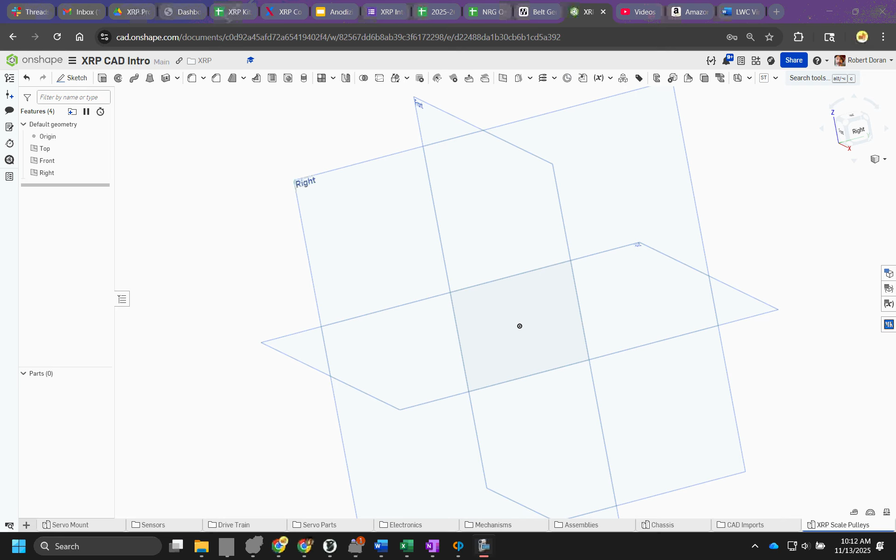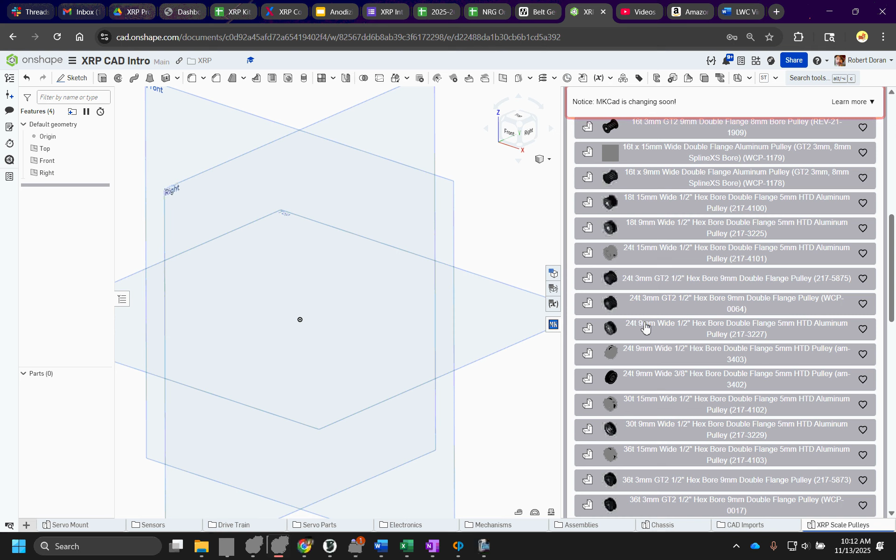All right, we're going to make a belt and pulley situation for an XRP scaled robot. You can get your pulley from a number of different places. MKCAD has a bunch, I actually recommend looking up a generator. I've got a generator or two, but we're going to just start with the one that's already available. We're going to go 24 tooth, 9mm wide. Doesn't matter that this is aluminum or not, but that's a pulley.

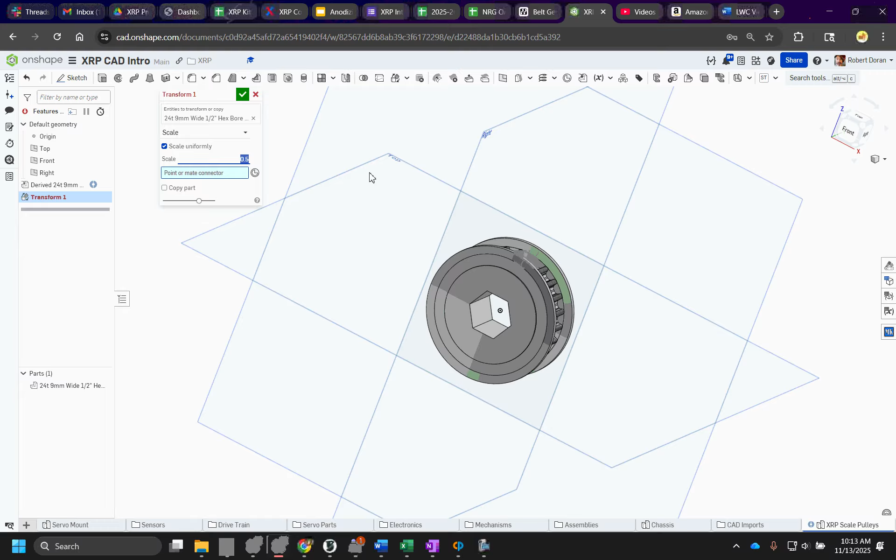Now, for an XRP robot, this is of course much too big, and you probably aren't going to use the hex shaft. The first thing we'll do is transform this. We're going to scale it down by 50%. Scale 0.5, and we'll just do the origin. There it is. A couple of things to modify.

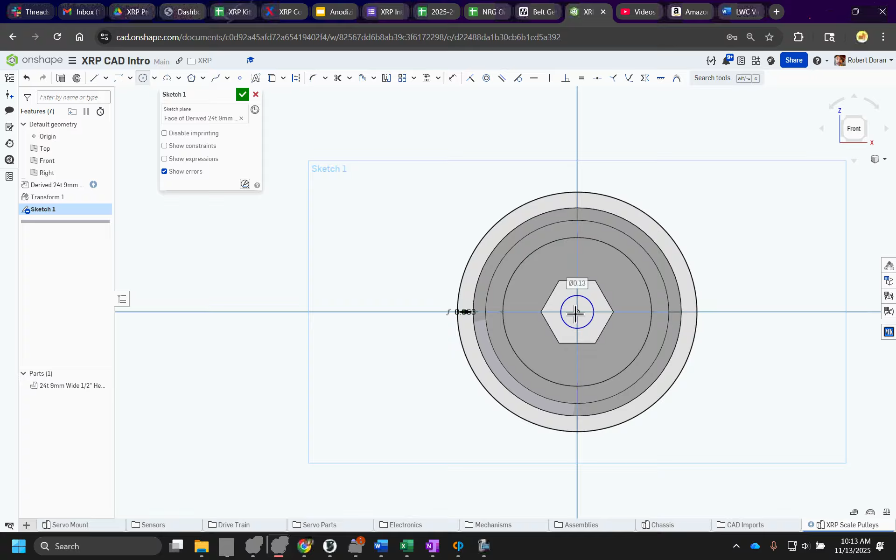I'm going to just sketch a quick extra flange I've found. I'll just do a little offset. It doesn't have to be giant, but maybe like a 1/16 of an inch of extra flange material. And then whatever your bore is through the middle, because if this is attached to an N20 motor or something, then the hex shaft isn't going to work. Or if it's a bolt or a bearing, make that whatever it is you want. This is our profile.

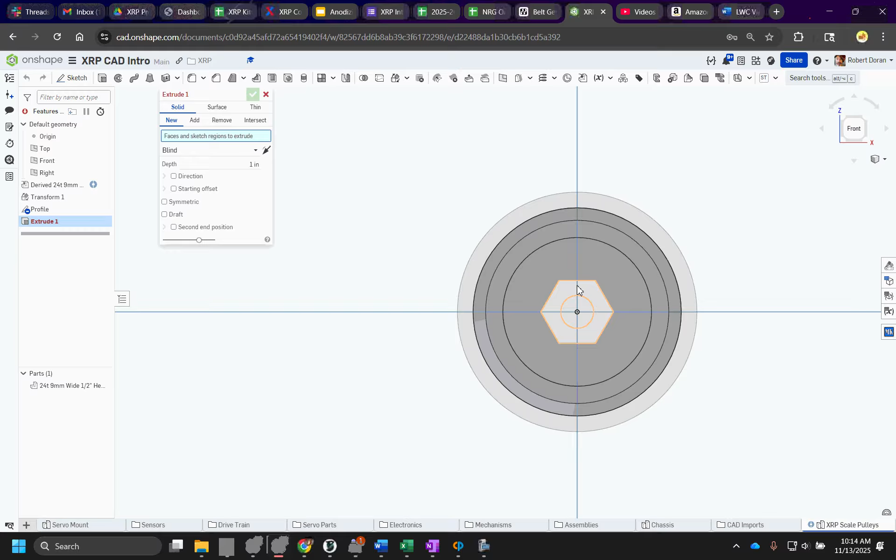And then extrude that however many ways you need to. So we'll extrude that through to the other side, however much it was. I didn't even check. 0.285.

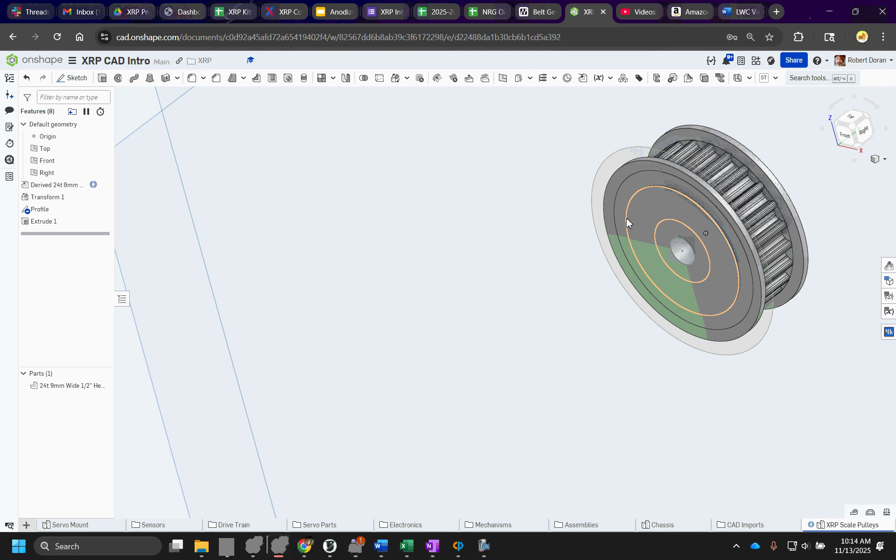And then your flange, and again, I would give yourself some extra flange on this one, because we're going to need to use this with 3D printed belts. We really don't want them flipping off. I don't know what the actual distance is here between these. 0.02.

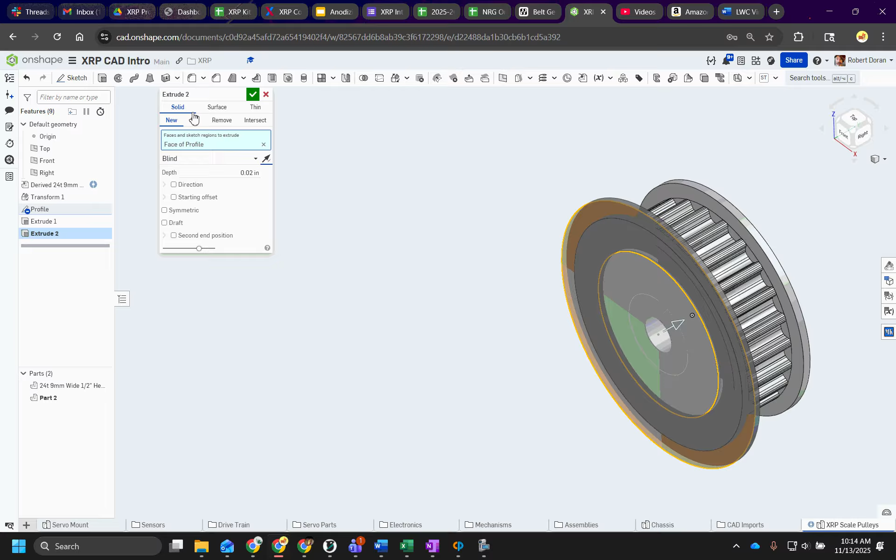So let's extrude our flange, 0.02 the other way, and please- right, extra flange that way. And I don't know why it didn't go all the way across. I'd rather that it did. So let's try that again. Instead of 0.02, let's go 0.034.

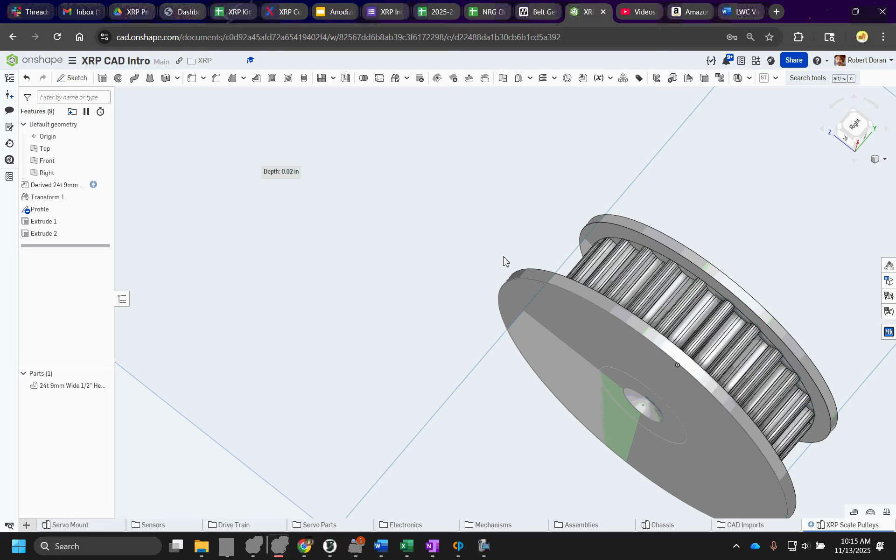It's okay to lose a little bit of fidelity and all this, it's gonna work, I promise. And then do the same thing, flange for the opposite side here. I'm not even gonna worry about that. Let's get ourselves- or let me just pause and do that again. There's our pulley. There it is, and it's small.

It's extra small. To get our belt, we're actually going to go over to Maker World. Maker World is Bambu's repository for 3D printed things, and they have a belt generator for your timing belts. We use HTD. We're going to customize. We're going to log in.

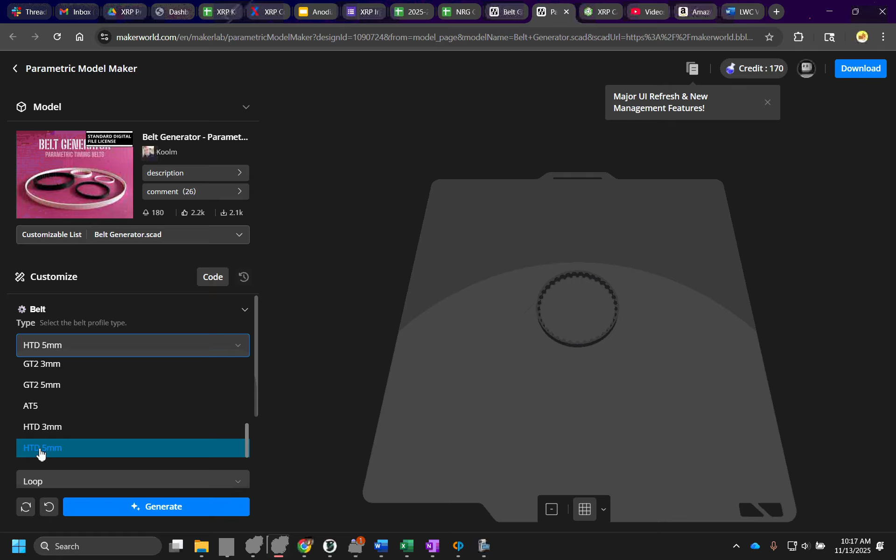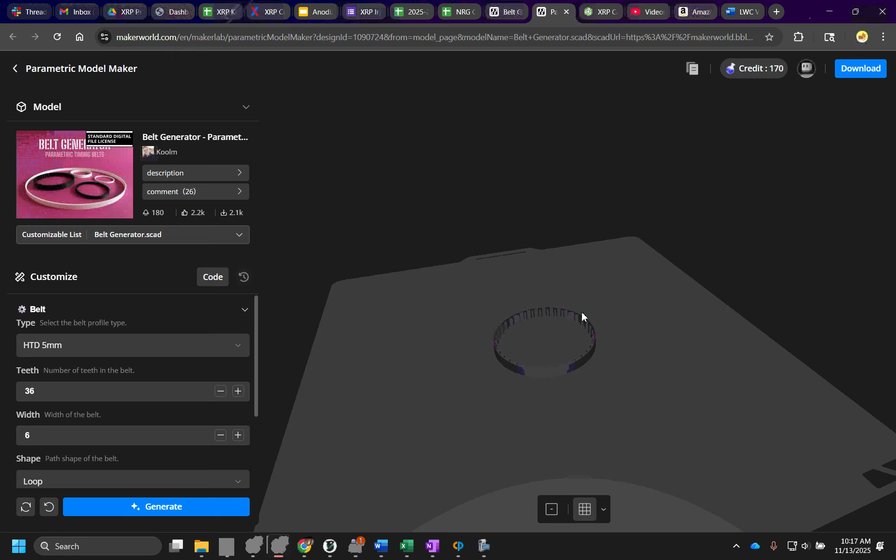Customize, and you've got a bunch of different options. Again, we use HTD 5mm, and you get to determine the number of teeth that you want in the belt. The way we use that is the WCP belt calculator to find your distances, and just remember, our distance is going to be double what you need for your XRP robot, because we're scaling everything down by 50%. So let's just say that we want a 100-tooth belt, and our belt is, let's call it 9mm.

There's the thing. Generate, successful, download. Let's go. It doesn't matter what you pick for your printer here, because we're just going to get the STL. We don't need a Bambu file. And I'm going to give it a quick name: 100-tooth HTD 5mm belt.

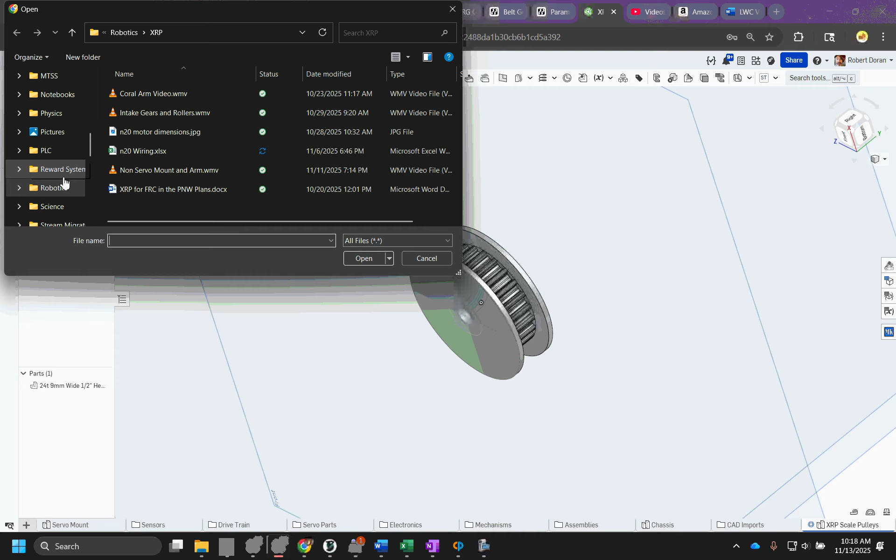Now remember, this is still full scale, which is a problem, so it's not going to fit on this one. I'm going to import it and then scale it down as well. Download, there's my belt, open it. It is going to come in as an STL. So just be careful, I think it's coming in as millimeters.

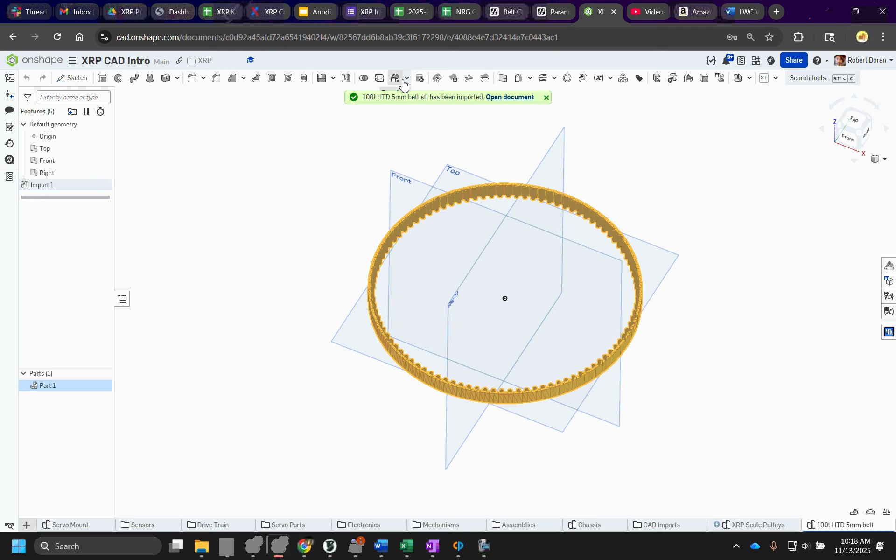You may need to adjust, right? Because everything in the 3D printing world is millimeters, and we do everything in inches. So be careful of that. There it is, there's our belt. It's too big, it's called the wrong thing. Either way, we're going to transform this and scale it down by 0.5, and then just adjust the center. Blam, there it is. Now I would also recommend giving this a little bit more thickness to it.

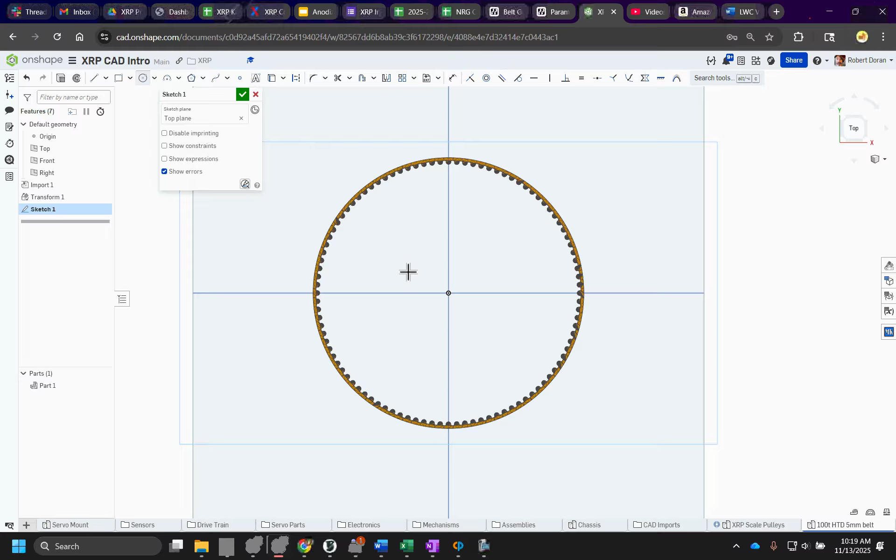Let's just sketch a circle or two. This is an STL, so it's just not a great file to work with. It's got way too much geometry. So I'm going to just do a quick couple of circles and extend its thickness a little bit, just for when we print this, I've found it could be a little bit thicker. I have had belts tear.

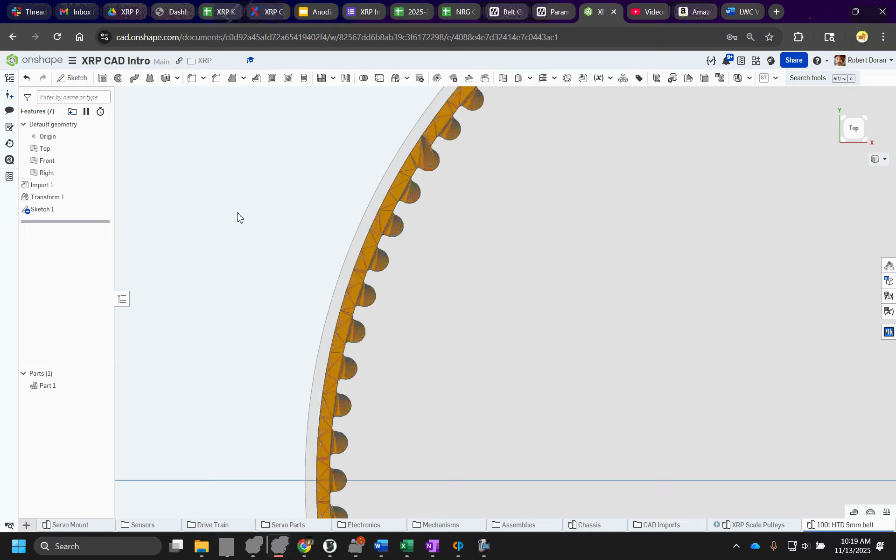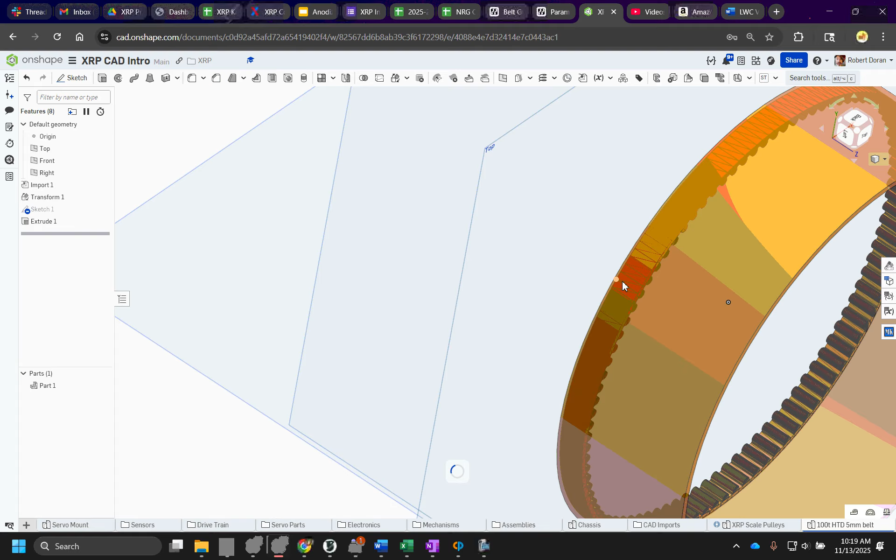And then as far as the depth goes, we'll go 0.177. Extrude that 0.177. Again, this is just going to make our belt a little bit thicker. 100-tooth belt.

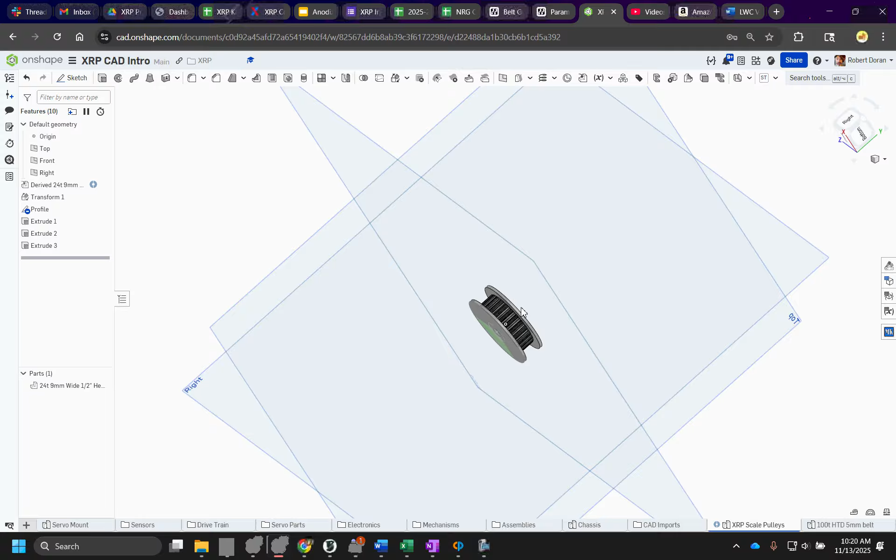This belt will work with this pulley, and it is at the appropriate scale to work with an XRP robot. Print this, TPU or PLA or whatever you want to print it with, and then the belt, I would print this out of TPU, and they work. I've already built an elevator with it, and they're pretty happy with each other. So give it a try.